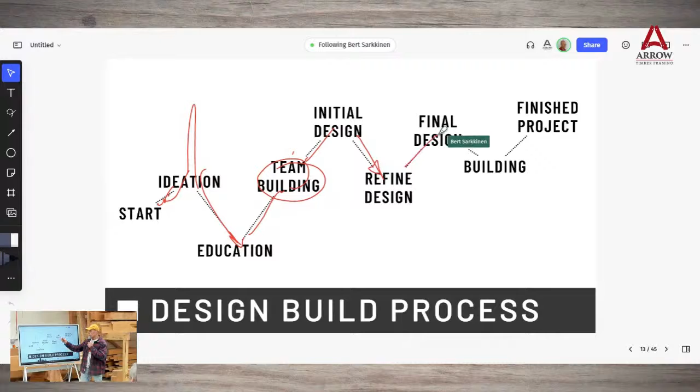But then you got to refine the design, you got to bring expectations. Never first choice, you can't have first choice with everything. Expectations take a little dip. The final design, you might not be happy with everything because you've had to make some compromise here and there. But okay, decisions made. So it's kind of a little boost.

Then the building, that's going to be kind of up and down from delays to now a product isn't ready, and more decisions and maybe decision fatigue and overruns or surprises. All that has to be dealt with. And so you got to kind of be prepared for that mentally. But what we've noticed is when people finally are in, the dust is settled, and you give them a month or two after they're in, everything's good. Generally ends well.

Does anyone have a similar experience? Does that fit your guys' perspective? George, you're smiling. All too common. All too common.

Okay, it's going into timber styles, and we're going to talk about floor plans. One thing to look for as we're going through this: 7 timber design sins.

So this one is just fast and furious, good enough. The way to avoid that one is to simply turn over more stones. Look for more ideas.

Too overpowering and too underpowering kind of ties in with turning over stones and figuring out ideas. But that's about proportion, paying attention to context. You could have a small house with a huge porte cochere on it. And its porte cochere might be designed right, but in context, just really doesn't fit.

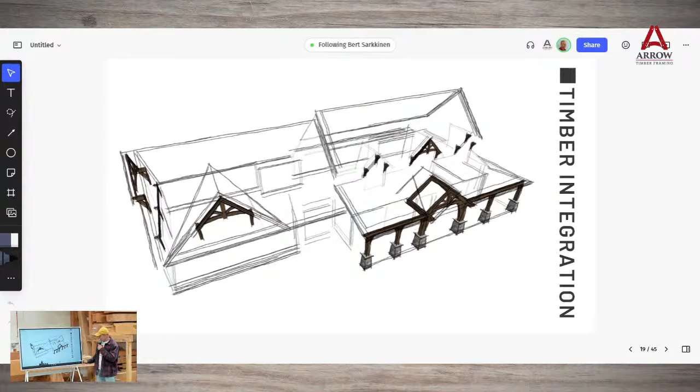And because it's so small and they wanted a couple bedrooms in that, it really makes the design part easy because you're just going for as small as possible while still being functional. So your bathrooms, you're trying to eliminate hallways, and your bathrooms and bedrooms are kind of as small as you dare. This is obviously a master.

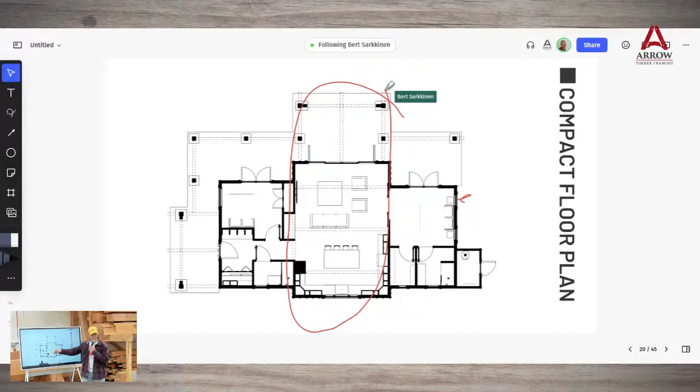But so things kind of fell together quick. And one thing we've noticed with timber frame plans, we call it kind of 'the mother' - that's some sort of outdoor living entry, the guts of the home being in the center, with bedrooms or garages somehow organized off of either side. That's something we've seen time and time again.

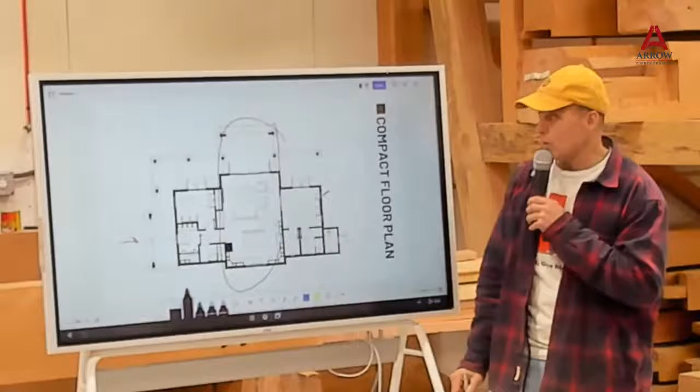In this particular case, because of the property, the entrance is here. The hallway is relatively short because this is so small. They do have a lot of covered area, and this is built in California, so they had almost small windows here. They had - well, you'll see it here in a bit - but everything was, this was south, this side is south, and there's very little glass.

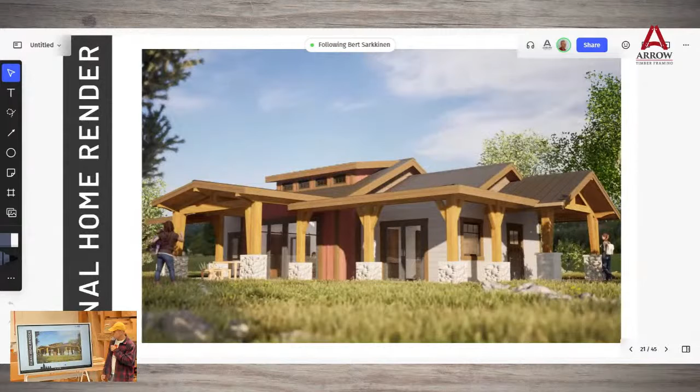And so it's opposite of what we do here, you know, we're looking for the sun. And this is the north side, looking at the north side here. So that whole veranda piece - there's small square footage, but in California, most of the year you'll be able to have people over if you want, so it's kind of flexible that way.

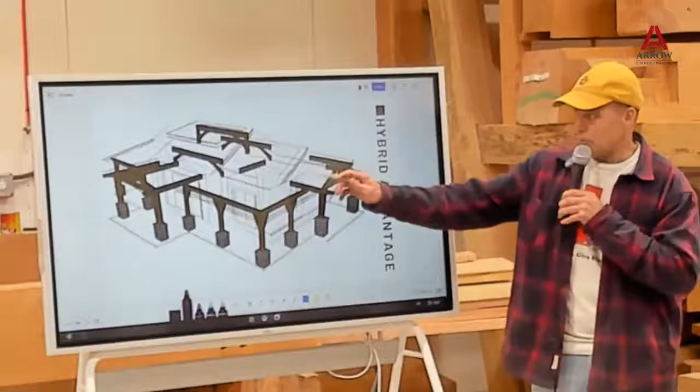And there's the timber package, mostly on the outside, with some timbers supporting the roof. Here's that cupola roof with the windows, and that's to the north again, in most cases.

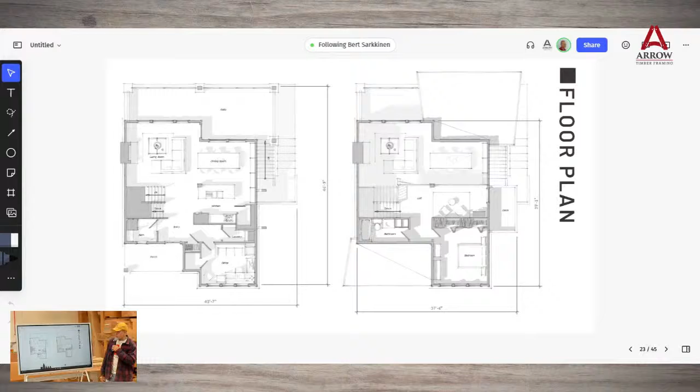What are some things that you notice? I'm just kind of curious what your eyes are seeing.

Yeah, this is the main level here. The entry's right there. And then this is the second story here with a kind of a loft, and that's open to the bottom.

Main floor is very open, and it's also dedicated to pretty much one room here that's maybe a flex room or office, but most of it is living space because it's 3 levels and a small footprint. So you're not getting that wings off the side.

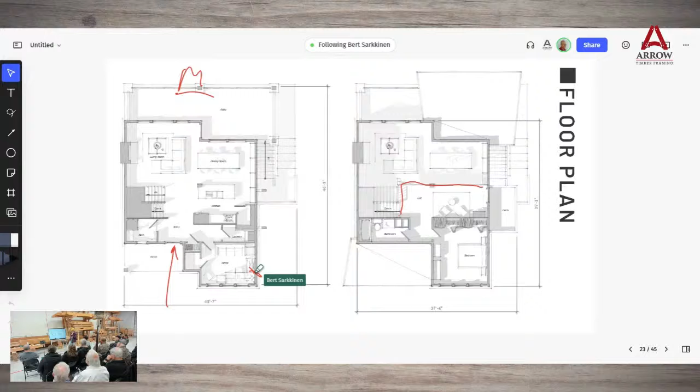And this is a modern timber frame style. I can show you here on the next. There's kind of the before and after.

One particular thing, let me tell you a little story about modern. Maybe 12 years ago, maybe further back, I could see that modern style was becoming vogue, starting to be a thing, and I started to worry about my livelihood. Timber framing is generally rustic and that sort of thing, and would I be in business in 5, 10 years? Well, it turns out that modern timber framing style has become my second favorite.

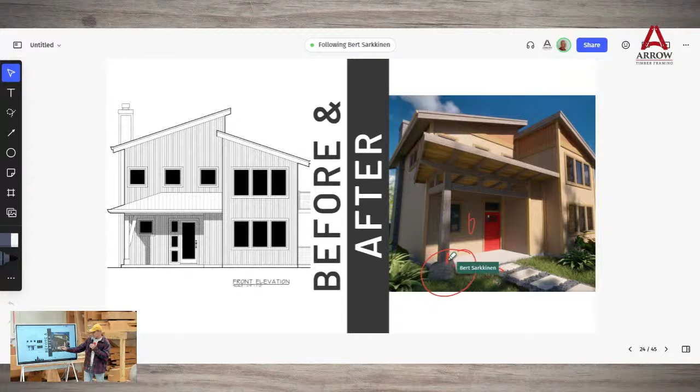It's just so fun to do. It gives you a little bit more leeway to try little zany things that delight in a surprising way. One of those things, using these stones like this, connects the finished space to the outdoor space. It's not cheap to fit posts to an organic shape like that and handle those rocks, but I love that. It's really cool, and you end up epoxying all thread in and connecting it, and it's a great way to lose money.

So this modern roof here changes. It's got a little cricket in there to shed the water, but it comes up and has some energy that invites you in. Any questions on this one?

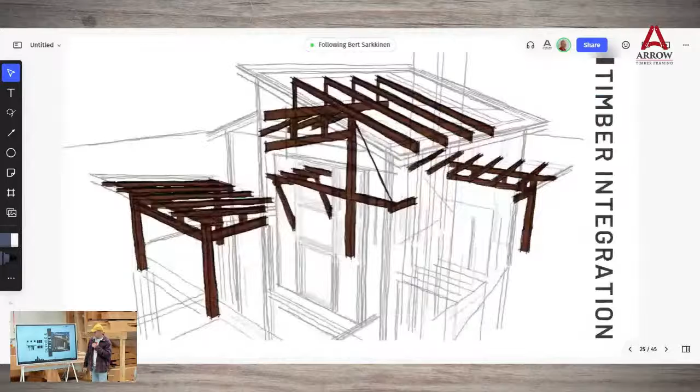And there's the timber package. Inside is a pretty cool little design for that loft and how the floor is held up. These posts here didn't look right until we got a nice little taper, and it looked like arms uplifting, supported with the cable, a little box beam, all fit into that loft area. If you can visualize that, it's kind of a cool space.

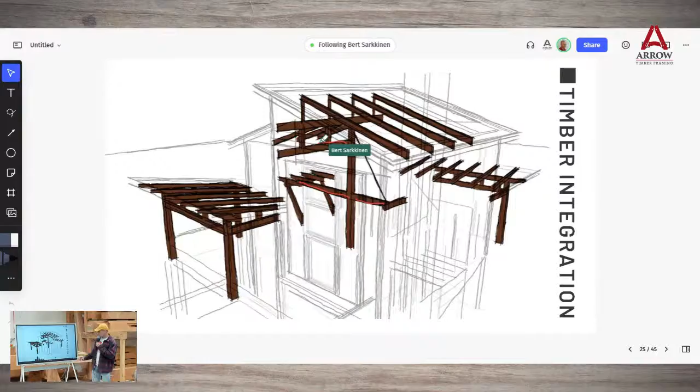Okay, is this plan more visible? What do you like about this plan? Anything jump out at you?

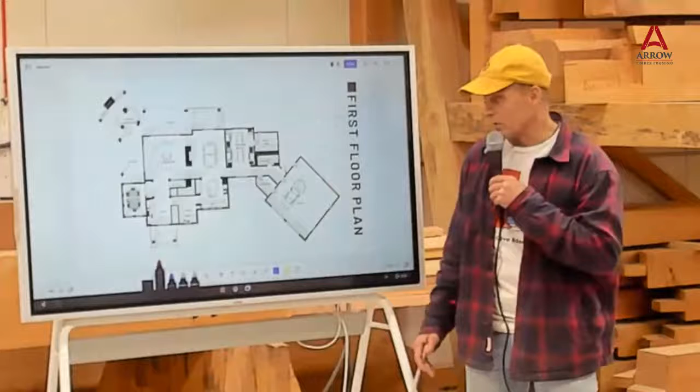One thing that's a little unique about this, well, let me tell you first, there's one thing the owner wished he'd have done different. It has to do with the dining room. Any guesses? He wished that he would have brought this out, because when they extend their table and have a bunch of people over, it would have made it nicer for big Thanksgiving and those meals.

But one thing that was unique about this, his dream was the timber frame great room, that big tall one you're all familiar with, you've seen it. That was one thing he really wanted. But he also had his square footage, he wanted to keep it to a certain size, and when things stacked upstairs, it just didn't work, you'd have wasted square footage trying to capture that. So one of the fixes was to have the steps.

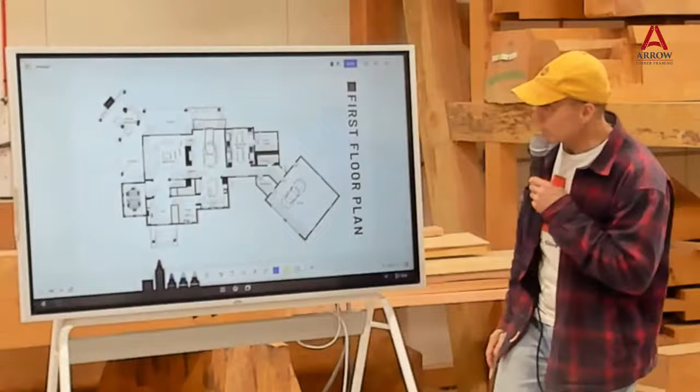So this steps down to about an 11-foot ceiling, and then there's room for some bigger beams and kind of a timberline lodge feel. This style classified would be like kind of classic. There's some soft curves to it, but it's very rustic. So big, classic, rustic would be the style.

There's the upstairs, master's on the upstairs. There's the home, and then there's the timbers. So pretty rustic, there's a lot of timbers in the job. Any questions with what we've covered so far?

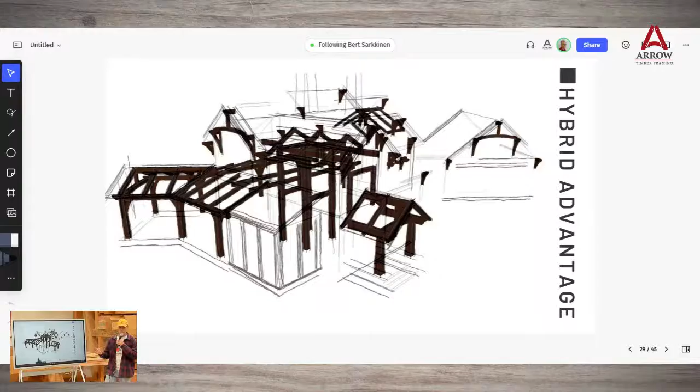Who went to the Street of Dreams, or Parade of Homes, Street of Dreams in Oregon, 2017 in Camas? You might have. There was one job, they give them names. This one they named the Timberline, and it won a lot of awards for the kitchen. I don't remember the particulars.

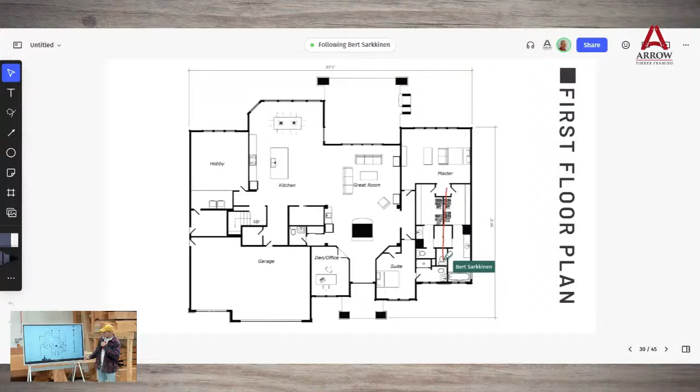Oh, this one has the upstairs on there, same plan. This is a little tiny guest bedroom up there.

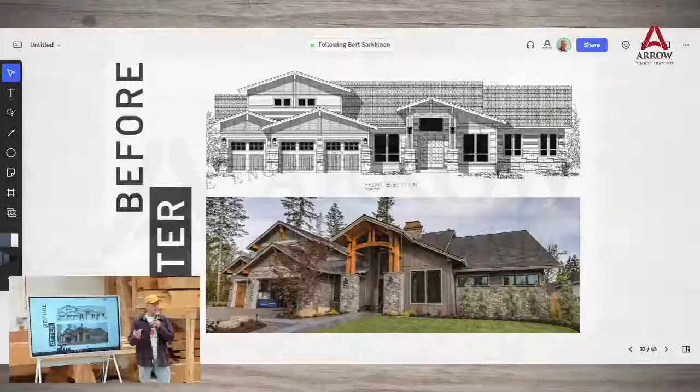So here's the before and after. This one I want to spend a little bit of time on because there's one little linchpin on this design that made this all come together. Because the difference is pretty dramatic, right? But in essence it kind of looks like the same house. So what's different? Roof pitch. Roof pitch, boom.

Maybe, maybe not. The roof pitch changed. What else? The windows changed. Over here, they might just be blocked in the picture. I'm not sure that they changed.

What was that? They did it right. Okay, yeah, for the closets, you're right. Any other things? So was that taking a standard design and changing it, or that's an existing house and then it's changed? This is working off of a blueprint. Okay, yep, working off of a blueprint, it's a change up on that.

And the reason we have a dog in the fight, so to speak, is if we can kind of influence the context and just make subtle changes to the context, like George worked with us on that for that house there. We work, and the timbers just fit, it's just easier to make them fit.

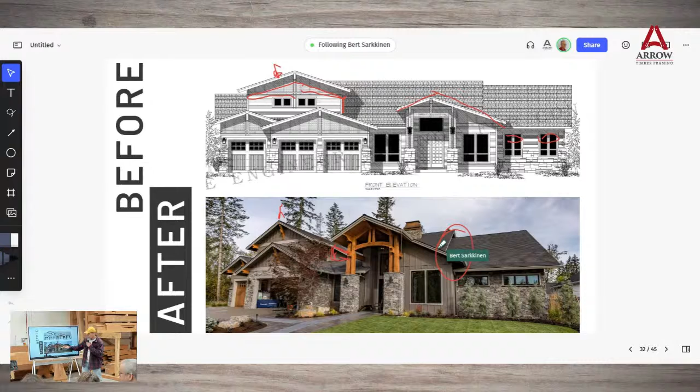That's just totally cosmetic, it's framed on top of the other roof, but it mimics this as well. So you get a little bit of tie-in with some flow. It's kind of built up and then built up, and it kind of just makes sense and flows. And nothing was really working until that piece got stuck in.

And so kind of one of those eureka moments. Was the chimney added, there wasn't one on top? Yeah, these might have been still in the preliminary stage. I'm sure the chimney was gonna be added to this. But that was kind of a story behind that one, and then you can see that's the mother plan here with the timbers in the back and the living on the sides, bedrooms.

And here's a plan. Well, let's see, what do you guys like about this? What do you notice? Big garage, yeah. Extra lot.

Look at the space, you look at the left side of the garage, that space, what's that? That's the mechanical room. So it's totally framed in front of it. Yeah, you access it from the garage side. So this particular plan is kind of an industrial rustic Craftsman, is where it kind of landed.

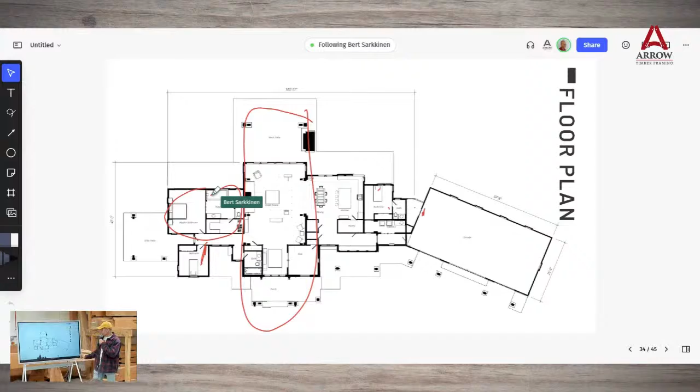What you've got is a truss that works like this. A truss is basically a triangle that pushes down and pushes out, and if something keeps the bottom from spreading, you have a truss. So these are down low and they lock in, so they function as a truss.

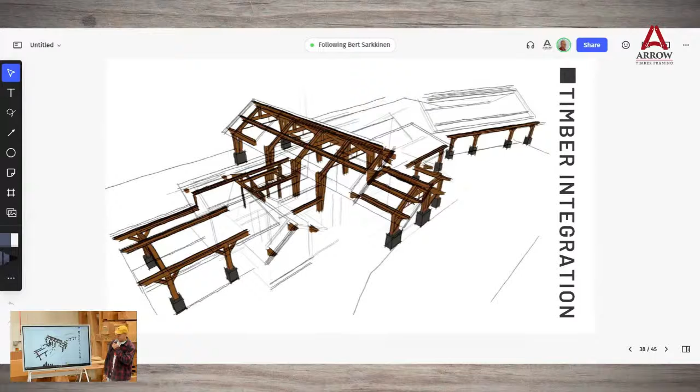Okay, our last example here has three levels, so I'll just walk you through it. The ADU, or the quarters for grandma, are down here. This is a 10,000 square foot house, so they had to get creative to fill it up. But this is for mama.

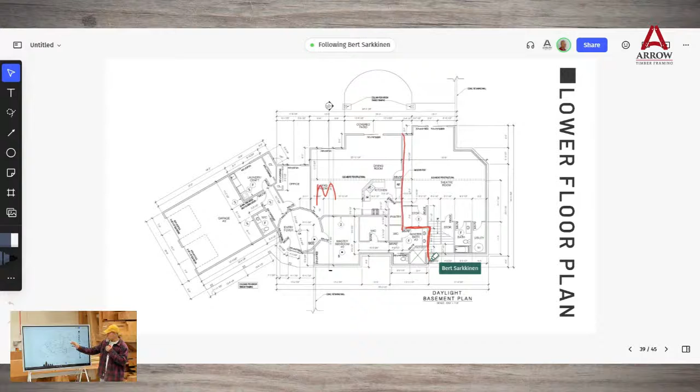This is the granny flat's ADU. They got their own garage down on the lower level. I don't know, is that 1,600 square feet? I'm not sure. Then they have the little rec room that connects to the main house on that side.

And then here's the main plan. The master's here. Here was the main focus.

The master bedroom had a unique ceiling, an arch, with the timbers arched like so, and they had a little keystone. It was kind of a unique little thing, and only a couple beams, but it really did a lot for the room.

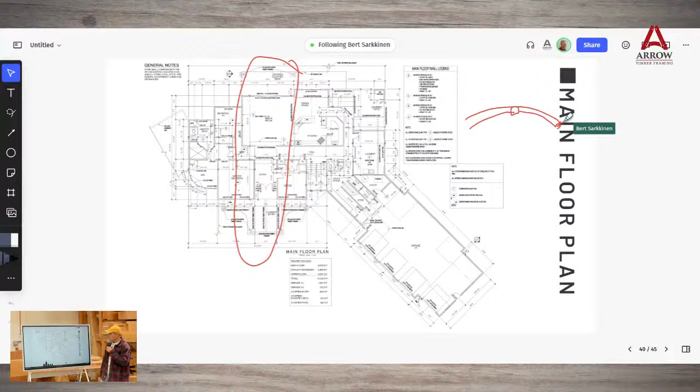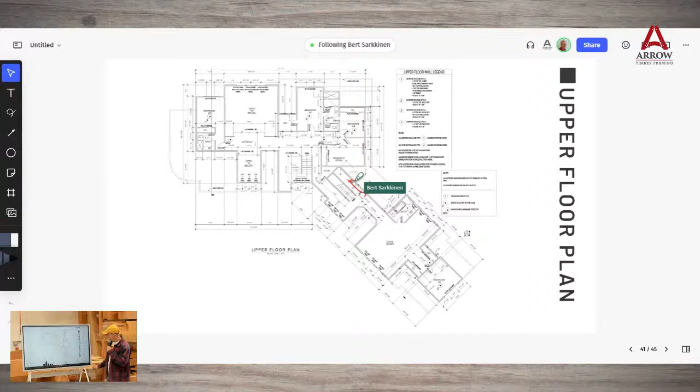Can anyone guess what this is right here? You got a stairway, and then this is down right there. Maybe some fast bowling balls? It's a slide. You know, the kids, they got a sleeping bag and they're trying to go down the steps, making a slide. Yeah, I was just gonna think of that.

Here is the timber package. So pretty.

When you say timber packages, is that usually something you could price out as a percentage of the overall house cost, or is it all over the place? It really is all over the place.

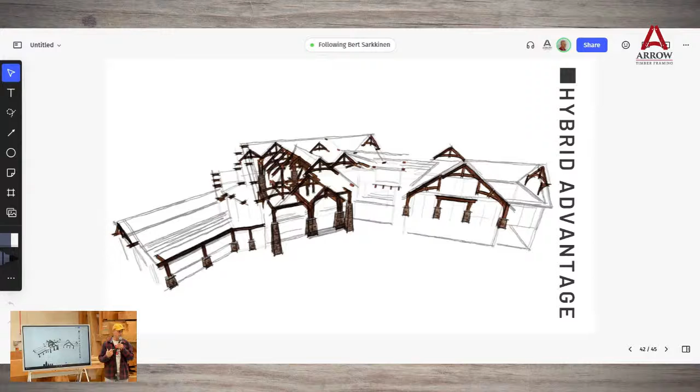In fact, the way we do business is we show people other projects, other signed proposals, what other people have agreed to for their budget and their desires. And then that deposit goes to the timber package. Once we accept the deposit, we work like dogs, we wear the ball and chain till the design comes home.

And that takes many iterations, because we start off thinking one thing, but we have to work through it, get an education, and figure out what we don't want. It's just part of the process. Sometimes it takes a while, but what that does is we get to go through all the fluff and all the different terms. Once we land on a design everyone likes, we can say, okay, here's what we're doing, and we can price it out. Then it's just more fun.

As far as a guideline for hybrid timber framing, we tell people that to get your house built, the timber package shouldn't really exceed 10% of your overall cost. That's kind of just a rough guideline, but if someone wants more timbers and blows past that 10% mark, we're not going to kick and scream. We might question their budget as it's going up, whether it's still relevant and still going to work, and so forth. But that's how the timber packages work.

And then we got to get out and get pictures, but sometimes owners want to get their landscaping in, so it takes a while to get pictures, but that's it.

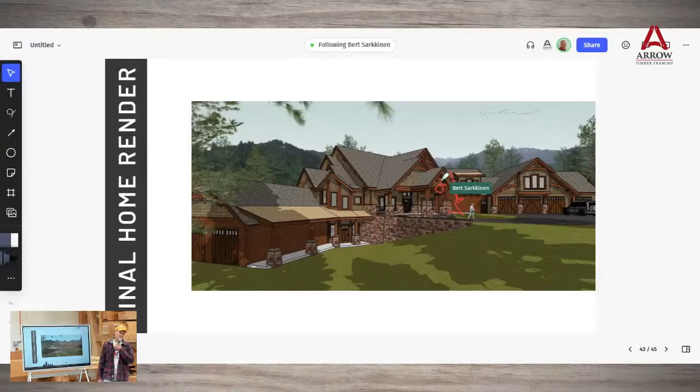Will you do it? So I ended up, to save costs, going out there by myself, loaded up tools. He had a guy that helped me in the mornings, but I don't remember the particulars. I think I ended up doing some sort of a scarf joint to replace the bottom of the post. I don't remember how it all came out, but it was kind of like pulling teeth leaving to go do this. But in the end, when you take a challenge and it works out, everything came out and it felt pretty good.

Okay, before we go to questions and answers, I would like to see, as far as our time together, does anyone have a note, something like, this is something I really appreciated learning, either from the tour or from the presentation here? Is there any takeaway or anything that really stood out as valuable to you? If there's a brave soul here that would like to share, that'd be great.